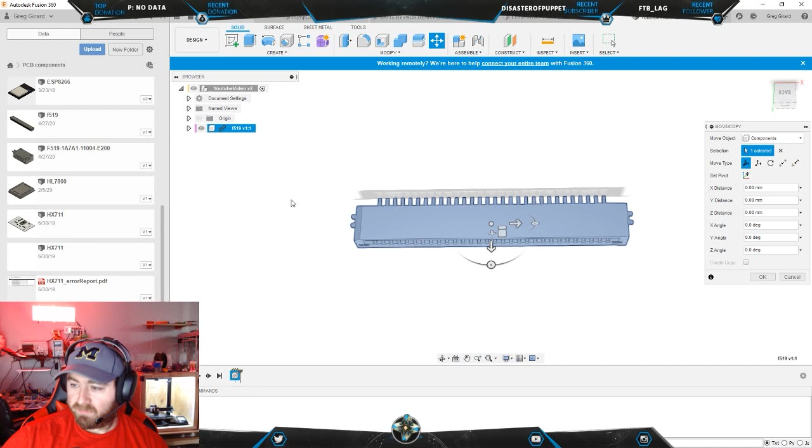You can see even though I wanted the 4-part, it came with a 20-part. I did scour the manufacturer website, I could not find a 4-part, so I need to figure out a way to use this because I really wanted the model to be in Altium. So first step we're going to do is we're going to break this link. This is going to be a new part, so we don't want it to link to the old step file for anything. Once that's done, click on the Activate Component button.

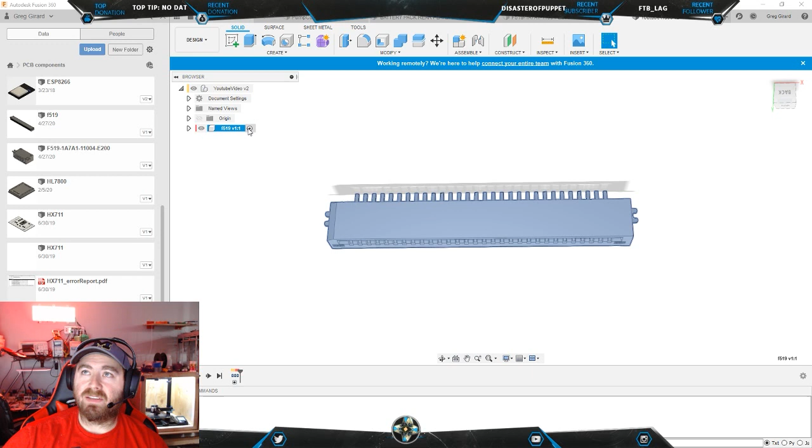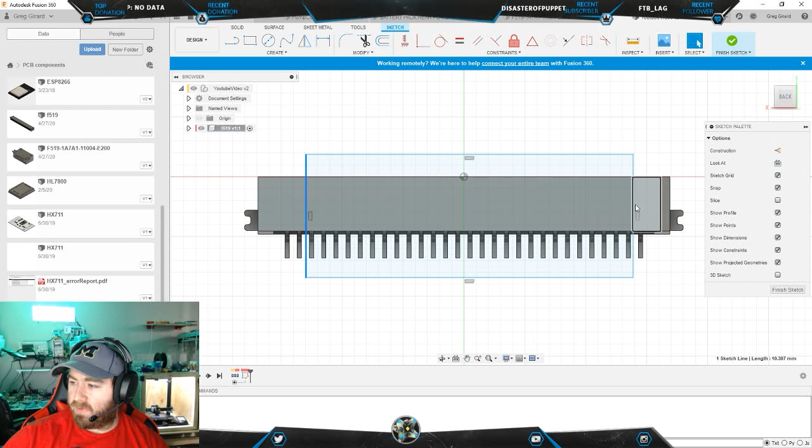Now where you have this activated, this trick does not work if you have the top level clicked. So now we're going to create a sketch on the top of this part. It actually flipped it around, that's fine. So we're going to do a rectangle. This has to cover the whole part and the pins, doesn't matter the size of it. We want it to be just in the area of the part we're trying to cut out essentially. So I want 4 pins, so I move the rectangle inside a little bit.

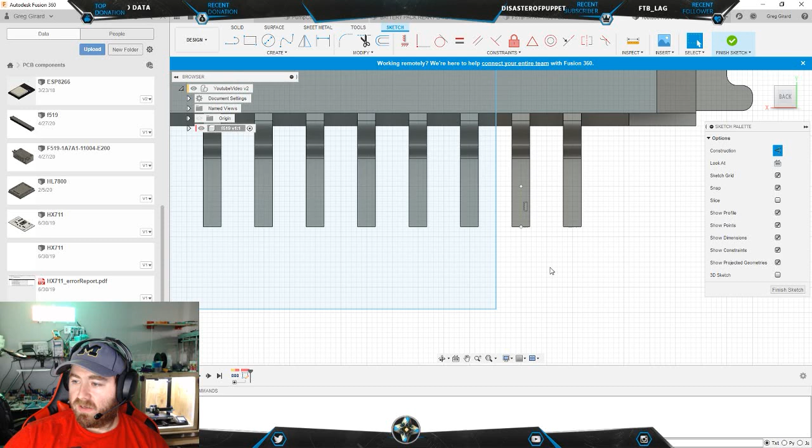I'm going to do some construction lines in the center of this pin. So I'm going to draw a construction line, doesn't matter the length. I'm going to fix it in that position. Again, I'm going to repeat the same thing on this side, and we're going to fix the position. If we go back to the browser, we can see the pitch on this is 1 millimeter. So if we're trying to simulate cutting out everything and keeping the pitch constraints, what we're going to want to do is dimension this rectangle from here to here to be half the pitch. So I can do 0.5.

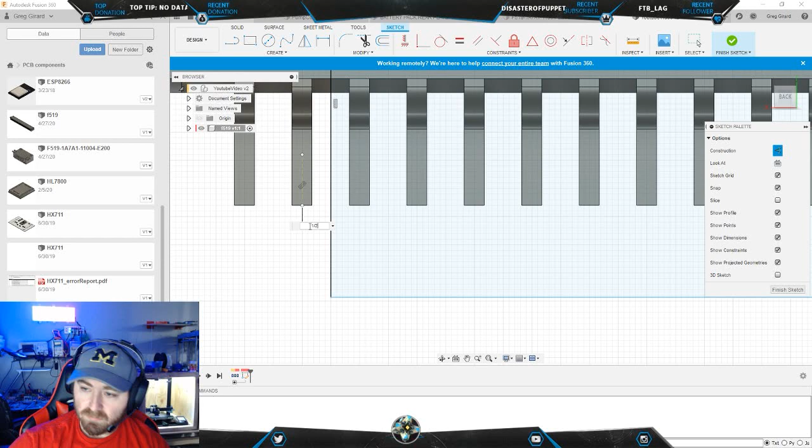If it's a more complicated number, you can actually put math inside of Fusion. So if we know the pitch is 1, we can just simply do 1 divided by 2, and it'll do the math for us. Just like that. Okay, now we got that. We can extrude, and if it's sections, you gotta grab all 3 sections, you gotta pull it, drag it through the part, and you want it to actually be a new body. Down here in the drop down is new body.

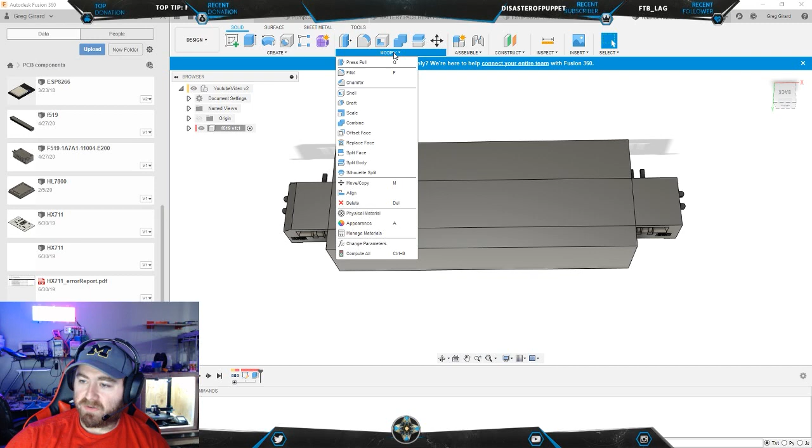Now that's done, what we're gonna do is split it. So we're gonna do modify, split body. You either can click each body separately, or if you go down to your tree setup, there's 2 bodies here now. So body to split is your main step file. The splitting tool is the block we just created. You hit split. What that'll do is it'll still show the old one, so it might not look like it works, but if you hide those 2, you get 2 new bodies here.

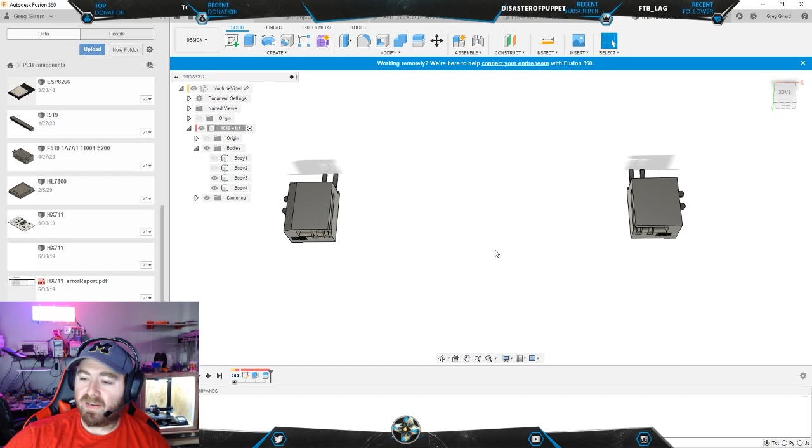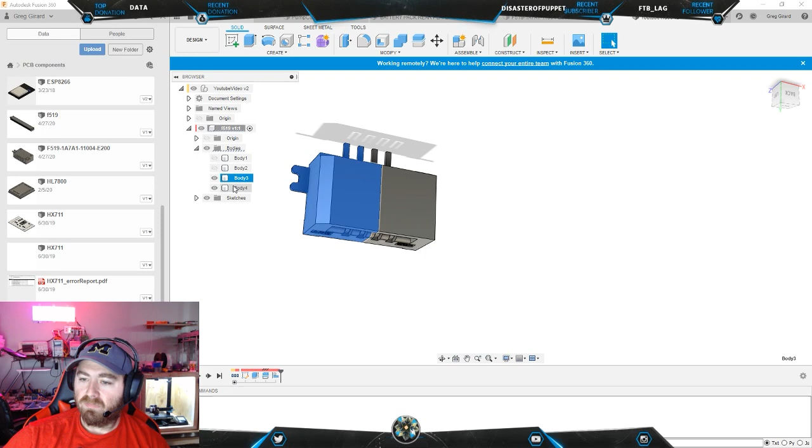Next, what you need to do is you need to make these parts touch to make the combine work. So if you do modify and align here, from one side to the next, like that, and make sure bodies are clicked up here for object. So that'll basically just pull the bodies together. And then if you click the 2 bodies and do combine, or you can come in here and just do the selections here. And then you can do join.

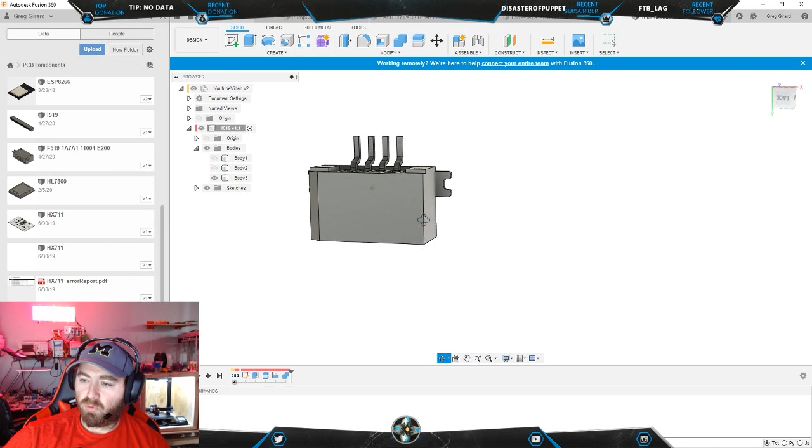You can make a new component if you want to here, or you can leave them both blank and hit OK. And that's it. Now that is a good representation of the connector as a 4-position that did not exist before. So yeah, that's pretty much it for this tutorial. I wanted this to be short and sweet.

Just trying to get my feet wet a little bit more with using Adobe and getting videos up, and I knew this would be kind of a useful tool for people. So that's it.